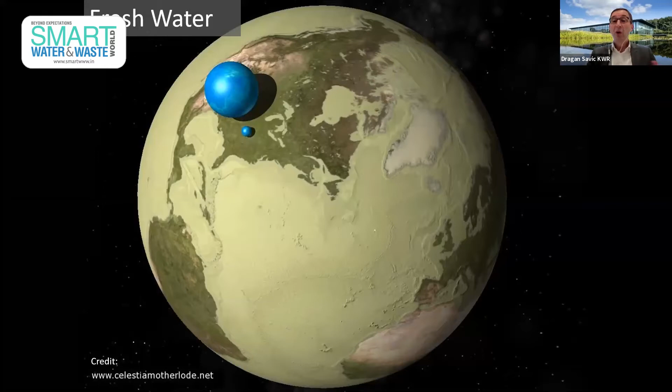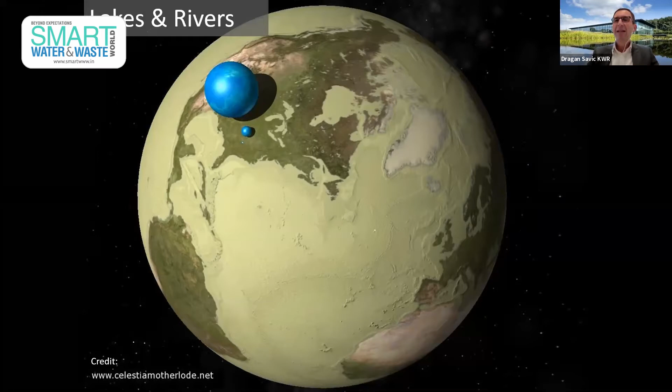And this has been so for ages, no more, no less. And then the smaller amount there, you can see that we have much less fresh water. And if you blinked, you must have missed it, this little blip here, it's the water in the lakes and rivers. So we really have to take good care of it.

If you look at it, 70% of the water is being used in agriculture, and then there is movement for people going into cities. Over half of the world population is now in cities, and there are 40% increases in population expected over the next 30 years. So we are facing big challenges.

So why wastewater? What is so special about wastewater? Well, over 80% of our wastewater flows goes into nature untreated. That's a sad fact and reality. So we want to reduce that amount of water going into the environment untreated, reducing pollution of the ecosystems, and reuse it - treat it and use it for various purposes.

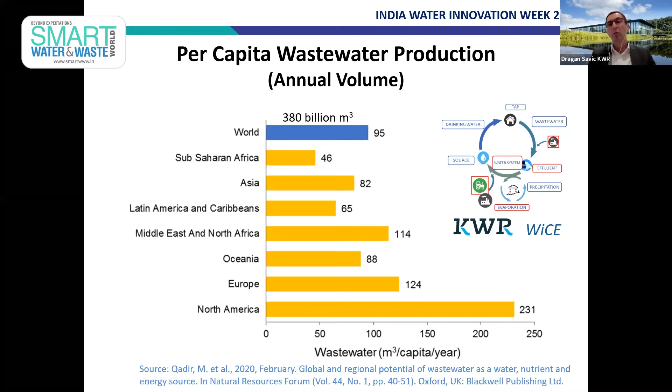And that's why circular systems, looking into water in the circular economy - what we call WiCE here - is very important.

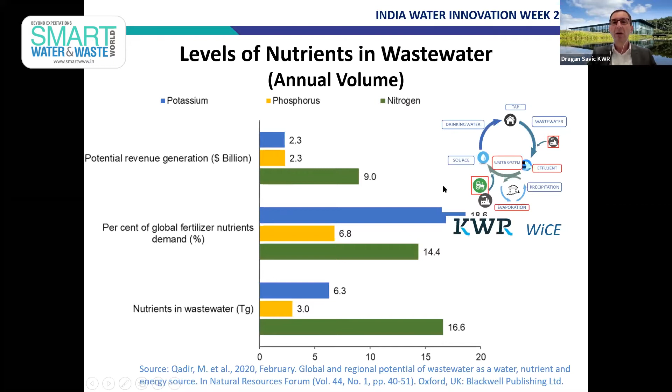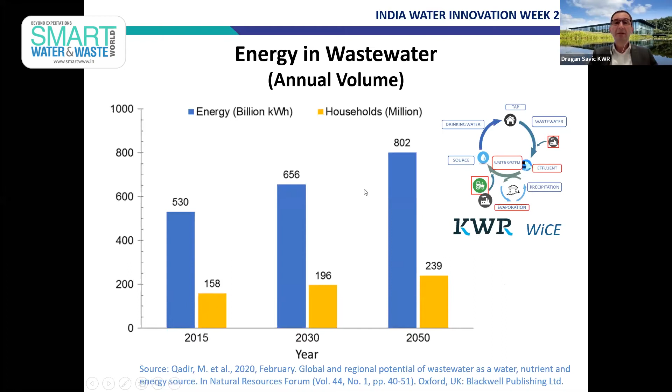And if we move on - I'm having technical difficulties, yes. Wastewater treatment and reuse is not new. As long as the world has been around, or humans, we've been reusing wastewater.

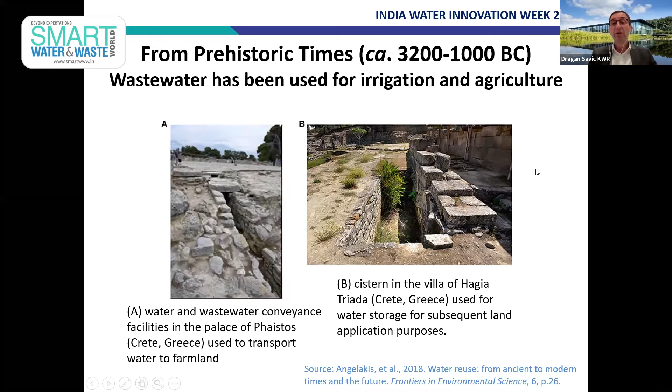These are examples from the Greek island of Crete. In prehistoric times, 3,200 to 1,000 BC, wastewater has been used for irrigation and agriculture.

So what are the different applications? Agriculture, obviously irrigation, landscape irrigation in our cities, and then industrial recycling and reuse. Industrial usage normally, in many cases, doesn't require drinking water quality. Recreation and environmental use - all those non-potable urban uses, not for drinking but for urban areas, groundwater recharge, unplanned potable reuse.

I can tell you that many rivers in Europe and on other continents - what one city releases in terms of treated or untreated wastewater, the other city downstream is using for water supply. And planned reuse - recently, I think 2 years ago, a city in Namibia celebrated 50 years of using some of the highly treated wastewater. The City of Windhoek was using that for augmenting their water supplies.

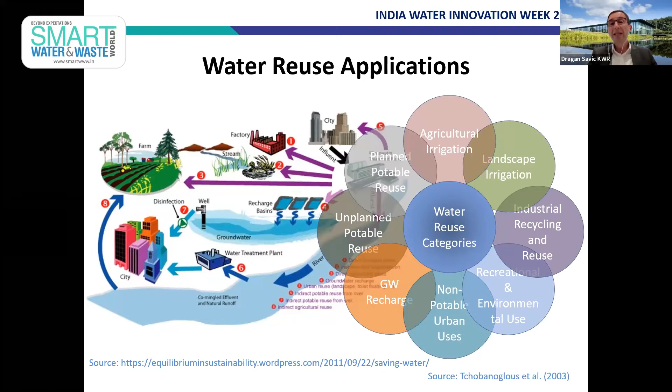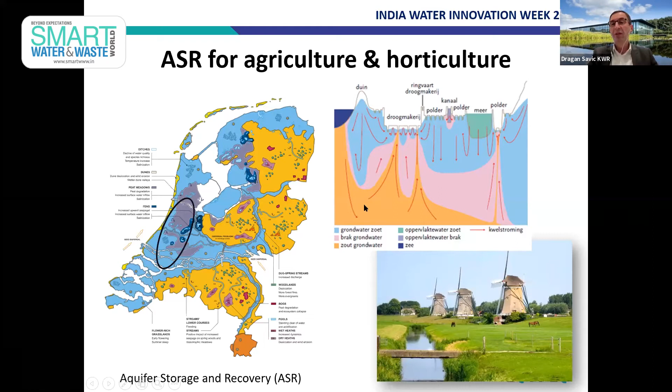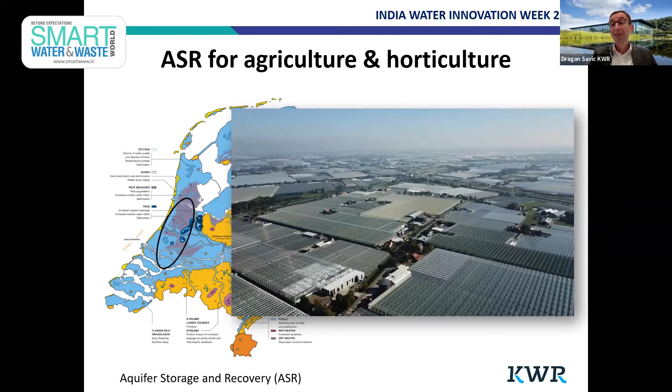So there is interaction there, and it's very important how much of this fresh water we have to protect it from becoming brackish and saline. The Netherlands is one of the biggest exporters of agricultural products in the world, I believe second in the world. What you see here is the greenhouses along the dunes, where they produce a lot of that produce for selling in the Netherlands and abroad. So they need constant and continuous irrigation.

This is an example where in blue you have greenhouses in Nieuw Prinsenland, 260 hectares of modern greenhouse areas. In this same area you have sugar factories producing from sugar beet. Sugar beet processing is done in a campaign, just 3 months a year, and requires lots of water, producing lots of wastewater, but only for those 3 months, whereas the greenhouses require water continuously throughout the year.

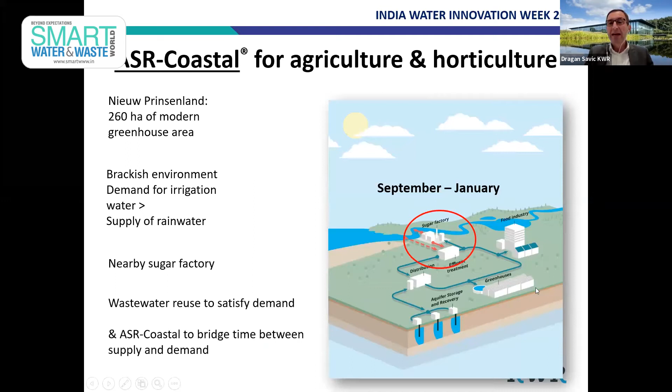So what is the solution? We have a brackish environment there, and demand for continuous irrigation is greater than the supply of rainwater. So what do we do? Here's the situation from September to January, that's the campaign when the sugar factory gets all that water produced. Then we have greenhouses that need it in spring and summer.

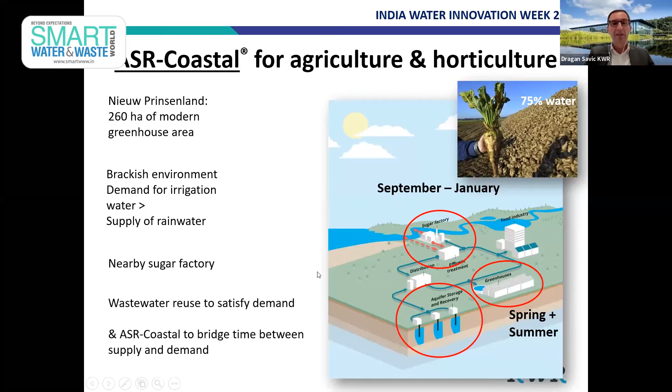So our solution is that all that wastewater is treated to the level required for agricultural irrigation. Then we put it into groundwater for storage, because you have that density difference between brackish salty water and fresh water, so we can keep it there. It's not easy, but we can do it, and then use it to bridge the time between supply and demand.

Another application involves underground drainage systems, pipes, perforated pipes that collect water and drain it away, but we use that system in reverse to do sub-irrigation when it's needed for the plants being grown. You can see Bavaria Brewery, that's food industry, but we're linking it to agriculture. The same thing happens in Haaksbergen, domestic wastewater applied to agriculture. All of it uses this existing drainage system, but in reverse when we need to irrigate.

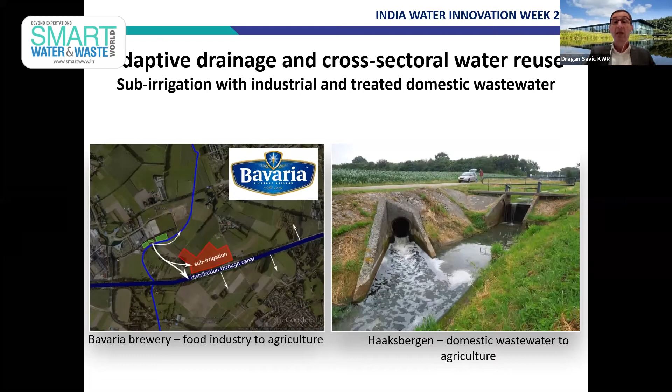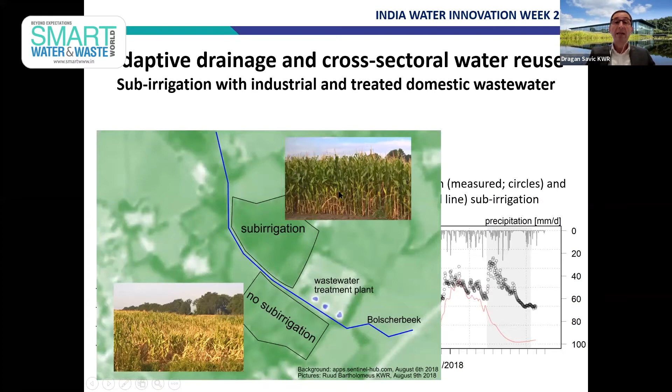On the left you have two areas, one that was sub-irrigated and one that wasn't. You can see the difference in the maize. When it was sub-irrigated, it was really nice. When it wasn't, it's really yellowish and brown. That slide didn't work well, it was showing something else later on, but let me move on.

We also at KWR look into quantitative microbial risk analysis, so we've developed tools to see what the risks are of using wastewater in various applications. We created this transparent, science-based online tool, which is also user-friendly.

This gives an example of how that tool, AquaNES, is used for water reuse applications. We see the quantity of microbial pollutants and how they are reduced: 1 log means 10 times less after the first treatment, 2 logs means 100 times less after ozone treatment, then 3 logs when it gets to slow sand filtration. We use Monte Carlo simulation to look into uncertainties at each time step, so you can test different scenarios. So that's an overview of some applications where KWR has been involved with wastewater reuse.

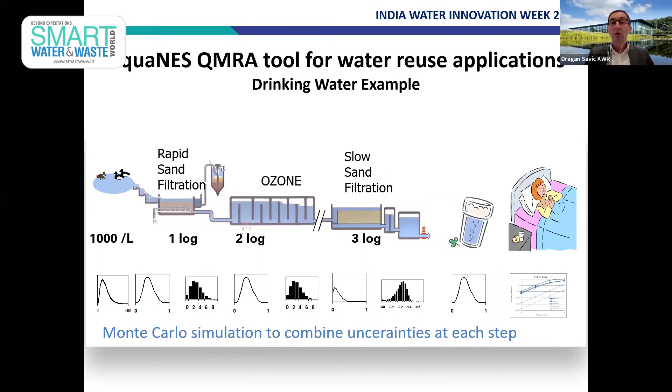As a conclusion, I'd say we need to move to responsible water reuse, where it's safe to use treated wastewater. This requires an incredibly interdisciplinary approach: you have to have health specialists, microbiological specialists, chemical quality specialists, and treatment technicians. So we're talking about sustainable use of water.

We need legislation and regulation, and sometimes regulation is much more stringent for treated and reused wastewater than it is for drinking water. Then we have various treatment technologies that we need to understand, as I mentioned, health and safety, quantitative microbial risk analysis. We use this when we look into reuse for agriculture or industry, and also subsurface water storage. Quite a lot can be done through water storage in the groundwater, both temporally and spatially.

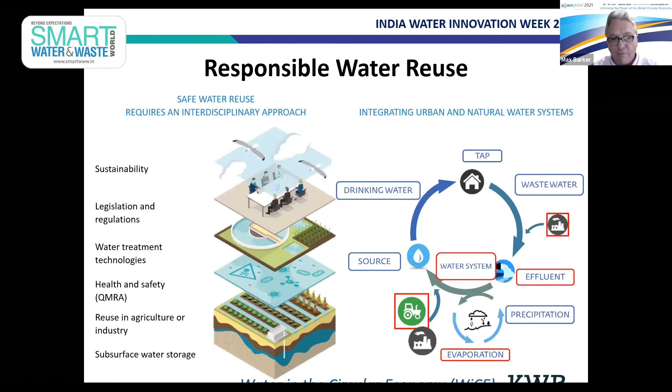Okay, fantastic. We've actually had a large number of questions come in for you from the audience, and we'll by no means have time to answer them all today, but I'll just pull one or two out at random for you. One of which is: out of overall energy available in wastewater, how much is it feasible to extract and is actually usable? Yes, that's an excellent question.

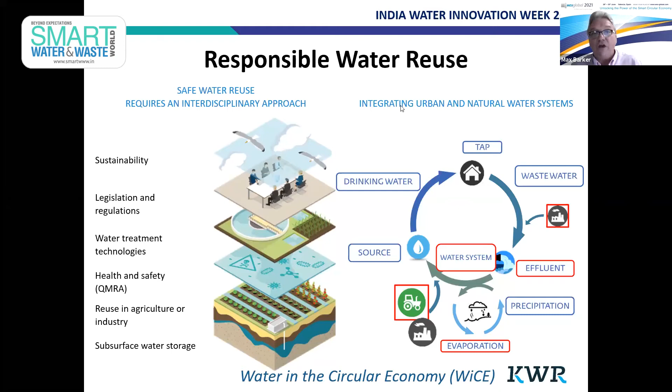We now have 5 case studies covering a wide variety of water reuse projects across the globe. We're going to begin with a look at the wastewater strategies of the Municipal Corporation of Greater Mumbai in a presentation given by Mr. Atul Rao, who in his role as the chief engineer on the Mumbai sewage disposal project is leading a number of really innovative initiatives to promote the use of recycled water by targeting bulk users. So to learn a little more about Atul's work, I'd like to hand over to you right now.

Max, the presenter is Dr. Ajit Salvi from the Municipal Corporation of Greater Mumbai. Okay, my apologies. Ajit, I'd like to hand over to you now. Okay. A nice keynote address by Dragan Savic. So I think with that, it will be easier for us to present our case studies. So thanks to Dragan Savic.

I am from the Municipal Corporation of Greater Mumbai, and this will be the small agenda for today's presentation. I will talk in small detail about the existing sewage system, that is the current scenario, then the present sewage disposal system, and mainly I will be focusing on the future plans, that is the treatment with recycle and reuse planning. That is today's subject as such. And then what are the challenges? Dragan Savic has already discussed some challenges and difficulties. I will also talk about these aspects, and then we'll conclude it.

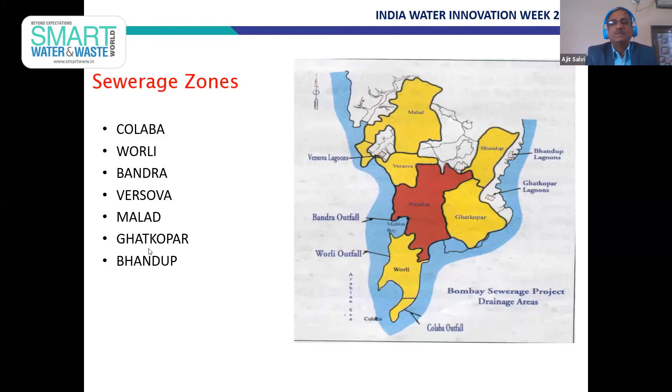Now, Kailash, just see, because it is not moving. Okay. There will always be a slight lag when you press click at your end. It will be a slight lag.

Okay. So this is the sewerage system of Mumbai. I am not going into all detail, but you can see that basically 3,850 MLD of water supply is there, and whatever water supply is there is converted into sewage as a thumb rule. Our sewerage system is almost 130 years old, and at present there is a coverage of 68%.

The sewerage network is around 2,000 kilometers, and the number of manholes covered is 73,213. The idea of this slide is that the existing sewerage system is very vast, and though it is not 100% covering the city, it is still almost covered.

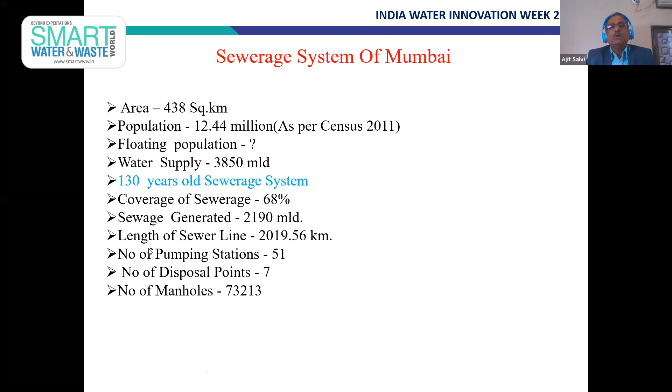Now, if you see existing facilities, as I said in my agenda, I am going to talk about the existing facilities. So these are the 7 sewerage zones, and these 7 sewage treatment facilities are there. Out of that, only one, Colaba, which I have marked in red color, is newly commissioned with tertiary treatment facilities. When I say tertiary treatment facilities, that means there are recycle and reuse facilities, and the capacity is 37 MLD. This was just commissioned in April 2020.

So this particular plant is newly commissioned, a full tertiary treatment facility, and we are planning that this recycled treated water will be used for reuse purposes. All our other facilities at Worli, Bandra, Versova, Malad, Bhandup and Ghatkopar are old facilities, and their treatment level is almost at the level of preliminary treatment.

In Worli and Bandra, the disposal is through marine outfall. In Versova, Bhandup and Ghatkopar, the disposal is through lagoons. But secondary or tertiary treatment as such is not done. So this is our old system or existing facility. Now we are going with the new plans.

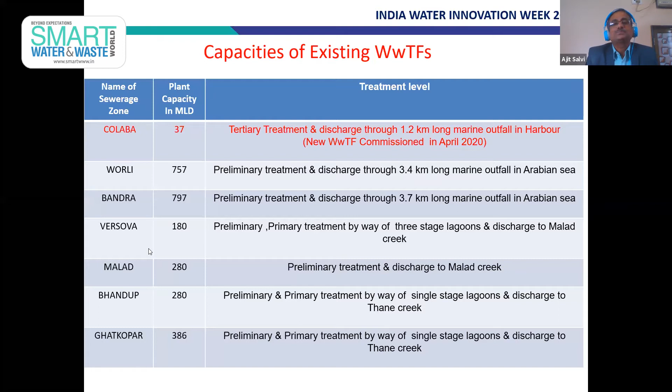So now for the future plans, as per the planning authorities and controlling authorities, there are new discharge standards set in India, and that is applicable to our municipal corporation also. The main aspects are BOD 10, COD 50 and TSS 20. Other things are also there. There is total nitrogen control, and phosphorus limits are also provided.

The point is, the new discharge standards are comparatively strict, and we have to treat up to the 10-20 standard, that is BOD 10 and TSS 20. Up to this standard, treatment is required, and accordingly the planning is already done and it is to be implemented.

Now these new projects are based on open technology. DBO contracts are there with operation and maintenance of 15 years as per the FIDIC conditions. And the main aspect is that there is a 50% capacity for recycle and reuse. That is the main aspect of our future plan. Now, with this,

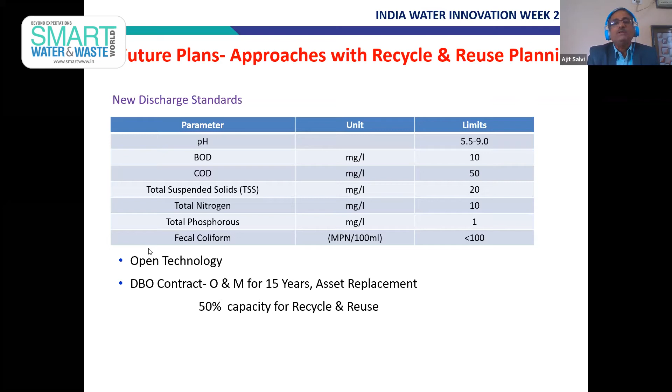so far as the tertiary standards are concerned, which we are going to use for reuse purposes, it is still a stringent standard: BOD as it is 10, but TSS we have to go up to 5, and fecal coliform should be below detectable limit. All other standards you can see on the display. My idea is, with all these stringent standards, we are doing the planning for the future, and we have to implement our planning based on these particular standards.

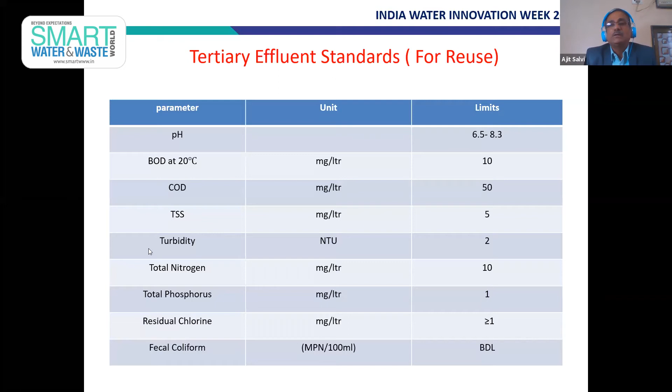No doubt, after that, there is a provision of the remaining 50% of the plant capacity to be reused in future based on the demand available for the tertiary treated water or treated wastewater. So based on that, for the remaining 50% also we will be going for the tertiary treatment.

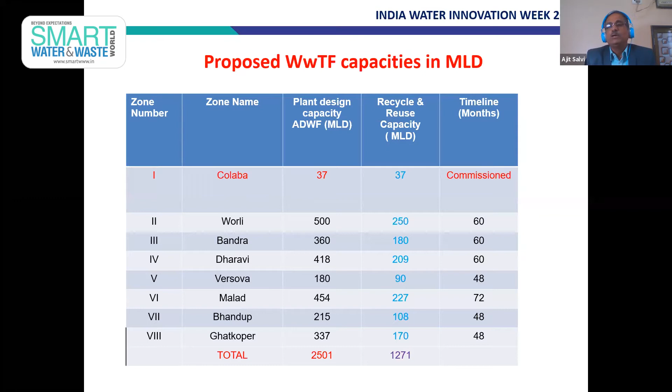Now, for new projects, particularly in Mumbai, there are some challenges in the implementation. We will talk separately about the recycle and reuse, but as such, with the secondary treatment and BOD 20, BOD 10 and TSS 20, with this standard also there are some problems. The main problem for us is inadequate land. As you must be aware, in Mumbai everything is available except land. So that is a problem.

This city is located on a coastline. So there are some mangroves, and there are some problems for removal of the mangroves, and definitely we have to obtain the proper approval for that. Then clearances from the environmental ministries and coastal regulatory authorities. At some of the places there are encroachments also. So before we go for the execution, we need to remove these encroachments also.

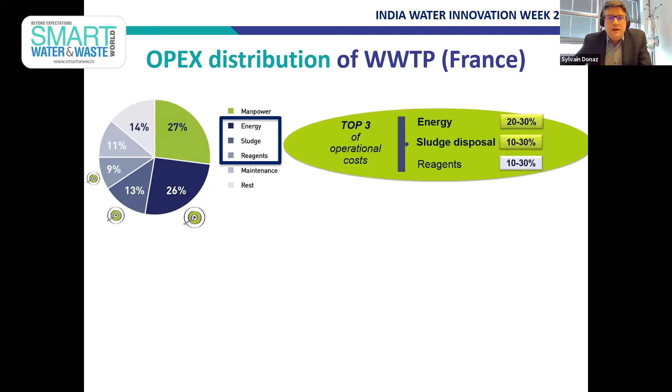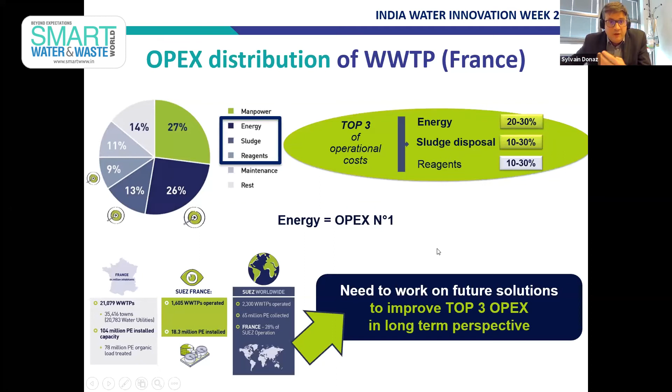As Suez, we are an operator and a technology developer, and we wanted to make sure we select the best, most energy efficient solution for secondary treatment. Therefore, we wanted to work on future solutions based on those top 3 OPEX: energy, sludge, and reagents.

So based on those analyses that we did from our operational base in France, we have noticed that the most and best energy efficient water treatment technologies are conventional activated sludge, that we call here CAS, and of course SBR, sequential batch reactor, and also biofiltration.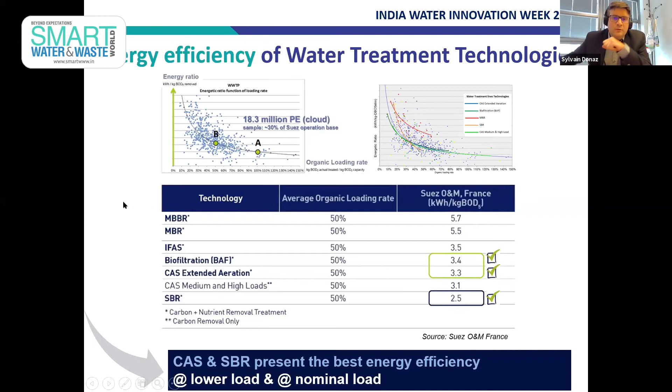So based on those status and analysis, we wanted to see how we could improve those CAS systems, conventional activated sludge, and SBR systems. So we have worked in the past 3 to 5 years on a new concept that is biomass densification, that implements a very precise controlled microbiome shift of the existing process, whether it is a brownfield existing plant or a new one that you want to build in greenfield.

So we have worked on a microbiome shift that transfers the former activated sludge of flocculated biomass to a new densified biomass, which is more heavy, which is denser, and which has a more cost-effective, operationally effective performance. This biomass densification is made of aggregates that have a size of greater than 200 micrometers that we increase in the biological system through a specific controlled microbiome shift that we implement.

Sorry, I need to get back. We have decided to implement this new microbiome shift in two types of treatment technologies, the first one being the continuous flow reactor of conventional activated sludge. So it's all about having a baseline with conventional activated sludge that you're going to shift to a better, efficient biomass with much faster settling abilities, thanks to a new control system. So these are for continuous flow reactors.

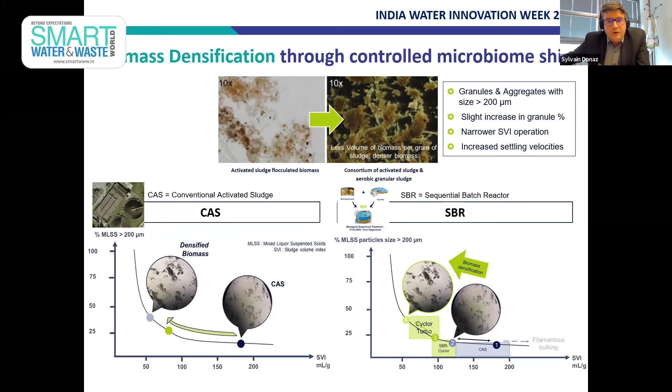For sequential batch reactors, we wanted to implement exactly the same shift of microbiome to increase the performance of the plant, and this had to be done on an SBR sequential batch reactor system. So I'm going to present you the two solutions, the two full-scale developments that we have finalized and validated in France on two separate plants, one in central France and one in south of France, where we had a continuous flow reactor applied with biomass densification and a sequential batch reactor.

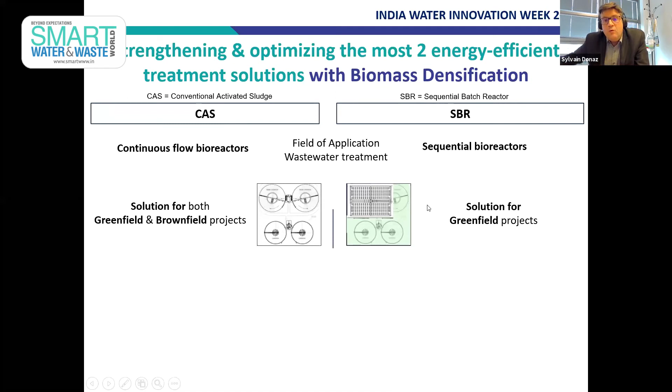As you can see, conventional activated sludge is most of the time applied for brownfield projects, existing plants, but we can also apply it for new greenfield projects. And when footprint is concerned for greenfield projects, of course, SBRs are a good choice because they provide a lower footprint that can ease the integration on site.

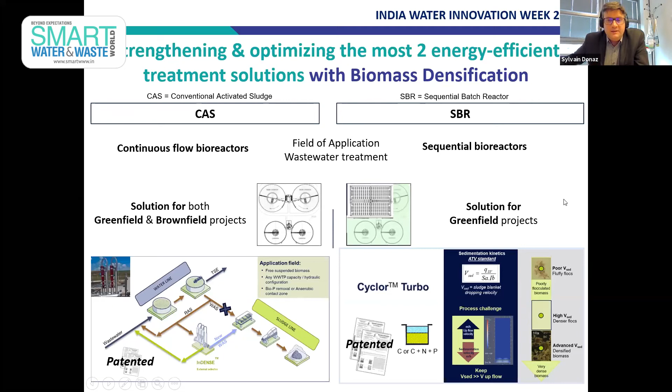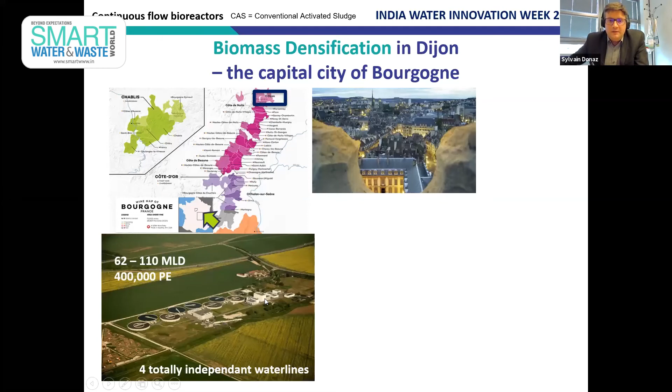So this is a wastewater treatment plant in the middle of the countryside, south of Dijon city. The capacity in dry weather is 62 MLD, megaliters per day, up to 110 megaliters per day in wet weather conditions, and the plant is treating about 400,000 population equivalent. So what you can see here is that this plant is made of 4 different lines, totally independent, that allowed us to implement and test in real conditions the famous microbiome shift using biomass densification.

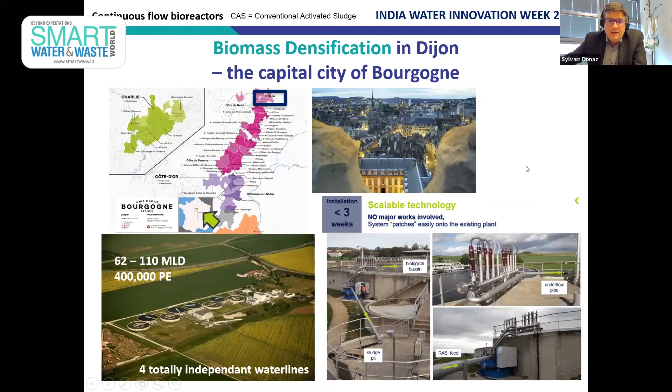So we have integrated the new technology, which is in fact a new process approach of how to handle biomass in a bioreactor system. This has been done very quickly, in less than 3 weeks' time, with a new equipment system and a new process control approach. So this was the site implementation that you can see here on the bottom right of the presentation, and I will share with you the nice performances that we achieved over a 1 year period, which means here in continental Europe, dealing with dry weather and extreme wet weather and cold conditions.

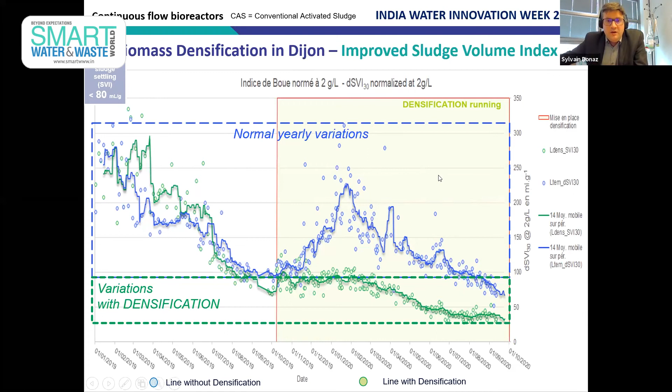We have achieved less than 50 milliliter per gram of sludge volume index, reaching today, as we speak, 35 in a continuous flow reactor system. This technology and full-scale test allowed us to find new guidance in terms of design and operational rules for new biomass densification systems. And now we are ready to implement it on any of the plants, brownfield and greenfield.

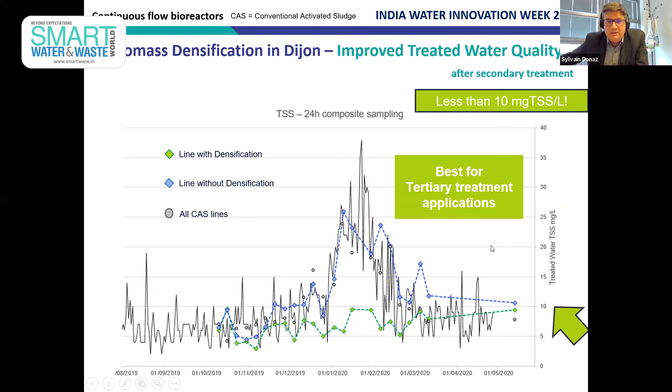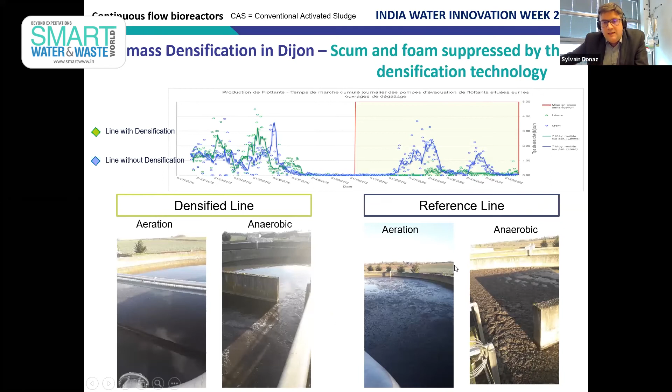I show you here the TSS, total suspended solids, that we achieved in this condition, where you can see in green that the quality of the secondary treated water is much better than the existing line, with lower than 10 in total suspended solids. So it's best for tertiary treatment. Also, in the picture here, the densified line has no foam production anymore, while the existing line is still dealing with a lot of foam in operation.

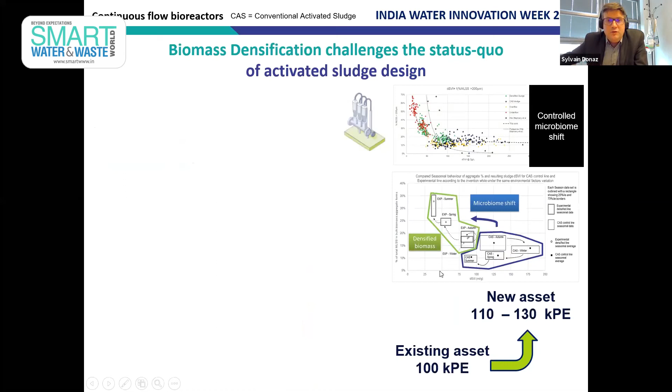I'm going to go fast to show you that biomass densification in a continuous flow reactor is a real microbiome shift from the existing baseline in blue to a new, greener biomass that is more robust and allows better performance. This is a new publication that we are releasing very soon.

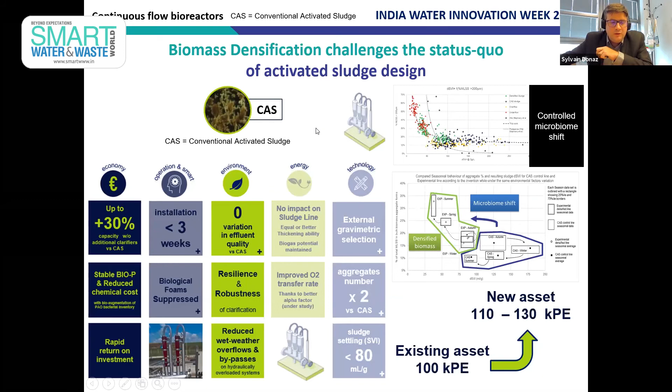So there are lots of implications, improvements, and impact for wastewater treatment plants across the world, and we are ready today to apply this concept in any of the plants to improve the quality of the water before any new tertiary system, whether it is for wastewater treated water reuse or micropollutant treatment.

Last but not least, in the French Riviera in Nice, in the south of France, you can see the city of Nice. Suez is operating and has built the wastewater treatment plant. This plant, you can see at the bottom, is in a very narrow footprint condition.

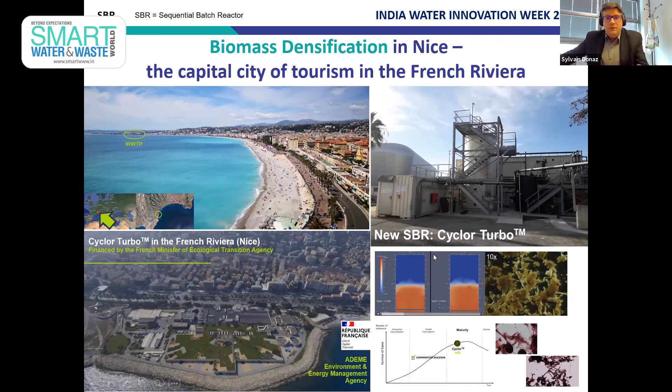So we studied the new SBR Cyclor version using densified biomass with the French government. We tested and validated it using a new type of system with new key hydraulic upgrades from our existing conventional Cyclor system, building a new generation of it. We did strong hydraulic engineering based on our existing Cyclor, improving the biomass condition through a new hydraulic design.

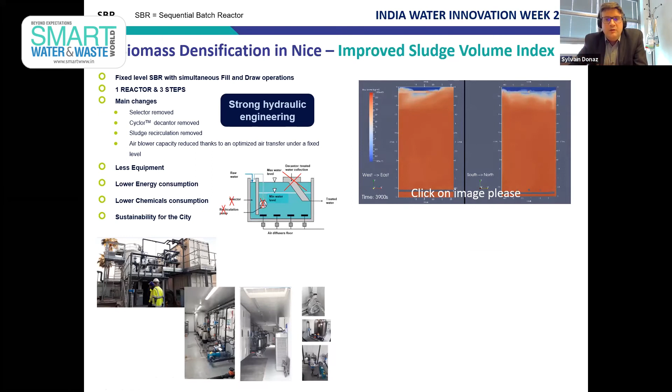So I show you that we worked on very tough hydraulic conditions that we mastered in deep detail to manage the best interaction between raw wastewater and the new densified biomass, to ensure the best conditions are met. We applied this system over a minimum 6-month period; it's been running now for more than a year, and we have validated the performance of the new system, with a very low SVI, stable and robust, thanks to the biomass densification system.

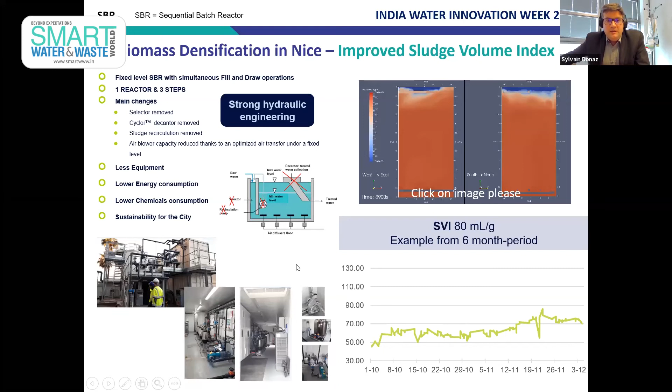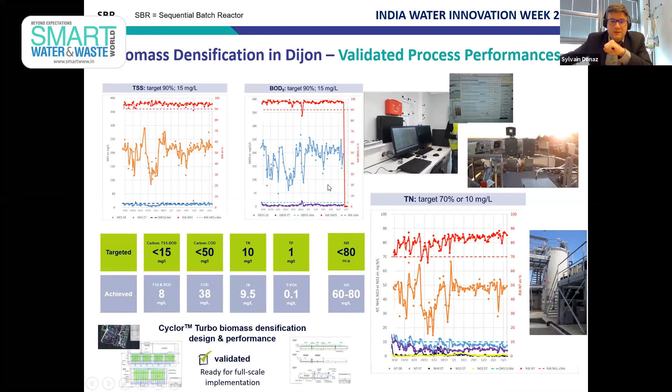So I would like to thank you, and let you know that we are very excited to share our latest development with this new concept, a controlled microbiome shift that we can implement in any bioreactor. This is our most recent result, which we are going to share more and more. Our most recent go-to-market solutions, as you have seen, are based on continuous flow reactors and sequential batch reactors that we can apply in brownfield expansion projects, retrofitting, or greenfield, whether you have footprint constraints or not. I thank you for your attention.

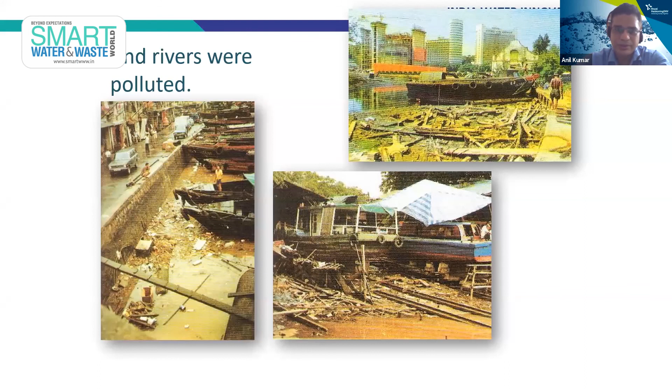The rivers were extremely polluted, and an initiative done by former Prime Minister Lee Kuan Yew - they made a policy where water is dominant in every other policy, and every other policy has to bend its knees for our water survival. This was the key message which went from the top leadership level to all departments in Singapore. With these efforts, every policy in Singapore has water has a place, and the recycle-reuse program started in the early 1970s, because of their relationship with Malaysia.

They had a couple of agreements with Malaysia which are going to end very soon. So the concept of new water, meaning treated wastewater, was launched in 2001, which means collecting every drop of water and reusing it as much as possible.

Currently 30% of the demand, approximately 400 mgd, is met by new water, which means treated wastewater. They are aiming to meet 60% of demand by 2030 and produce new water to drinking water quality levels. Currently, they use this treated water for industrial applications and also indirect drinking reuse.

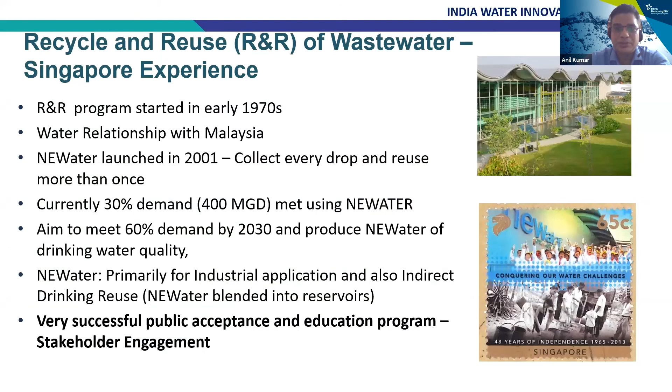They blend the treated wastewater into their reservoirs, and then supply it after treatment to the public. It's a very successful model that has been in discussion for many years, with huge public acceptance. The government has spent a lot of money on public acceptance education programs, including stakeholder engagements, and even created stamps promoting recycling and reuse of wastewater.

So how have they achieved this? Most of the water comes from Malaysia through two agreements as the main source, and they see that as a risk for the country over the next 20 years or so. They recognized that risk in the early 2000s and took an initiative.

They created one department which can manage the entire water cycle, and they diversified the water resources into four national taps. I will talk about the four national taps in the next slides. So all the water supply sources come under one department.

They had unified agencies, made a national theme, and prepared a strategy so that this sustainability concept in water management could be adopted into Singapore's water management. The four national taps they identified are stormwater management, imported water, seawater desalination, and treatment of used water.

From these sources, they developed their infrastructure, like treatment of used water—what we normally call wastewater, they call 'used water.' They reclaim this treated water and mix it with their water supply source.

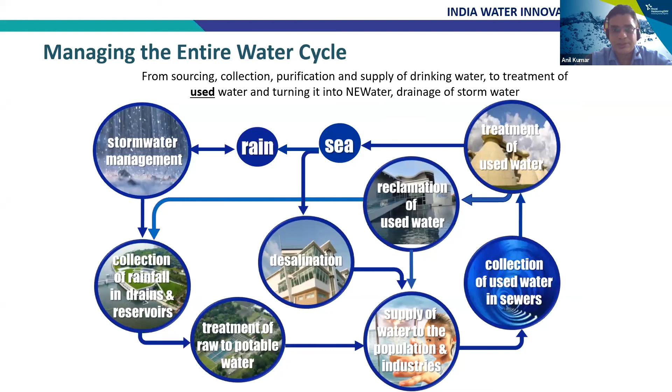They also manage stormwater, collecting rainfall into their drains and reservoirs, and now use that water for potable purposes. That's how they manage it—most of their water, including wastewater, is treated and collected very well.

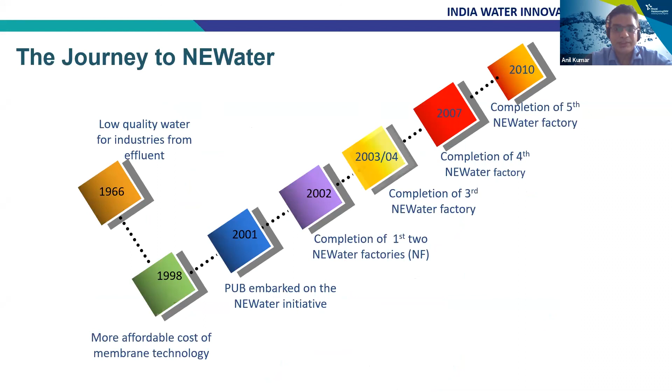The journey started from 1998 onwards, and by 2010 they had completed almost 5 plants producing new water. PUB has taken on the role as an entity to manage this entire initiative for the Singapore government.

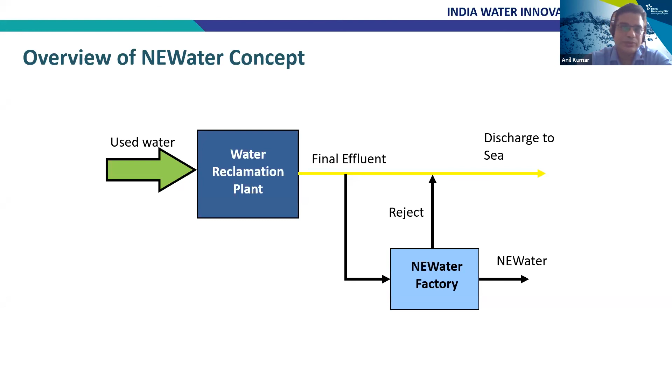So for the concept of new water: they had a traditional wastewater treatment plant, called a water reclamation plant, and that water is used in the new water factory. In the new water factory, they produce what's called new water, which is now used for various purposes in Singapore.

The production process adopted in the new water factory: the treated used water is passed through microfiltration, ultrafiltration, then reverse osmosis, and then disinfected using ultraviolet disinfection. In fact, they use this water even for drinking purposes.

If you visit these plants, you are served with these bottles actually. I myself drank this water a couple of times whenever I visited Singapore.

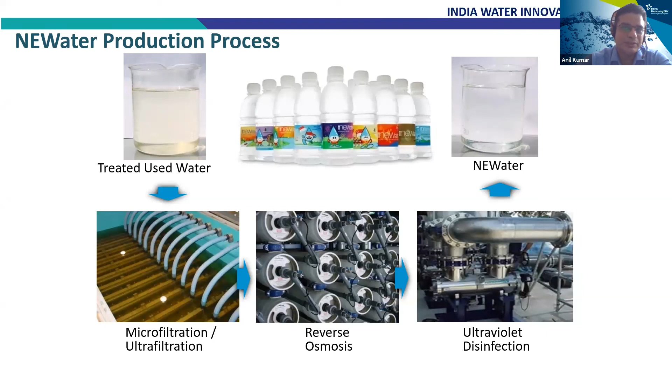One of the great initiatives they have taken is working on their organizational setup. They made a steering committee chaired by the Prime Minister himself. There were various panels formed, from consultants to technical committees to expert panels, starting with sampling and monitoring programs, followed by a demonstration plant, and they also had a health effect study team in place. All these core organizations are responsible for managing the complete new water system.

This structure is still in place in Singapore today. Currently, through their sampling and monitoring program, they monitor 295 water quality parameters, over and above the 100 parameters specified by US EPA and 114 specified by WHO. This is the most comprehensive water quality study the Singapore government conducts as of today.

There are wide varieties of parameter categories they monitor, following best laboratory practices. They have a very good QA/QC team and have set analytical protocols adopted by many other countries. The quality of data they manage is really good, and it helps a lot in troubleshooting issues they come across in the loadings entering their wastewater.

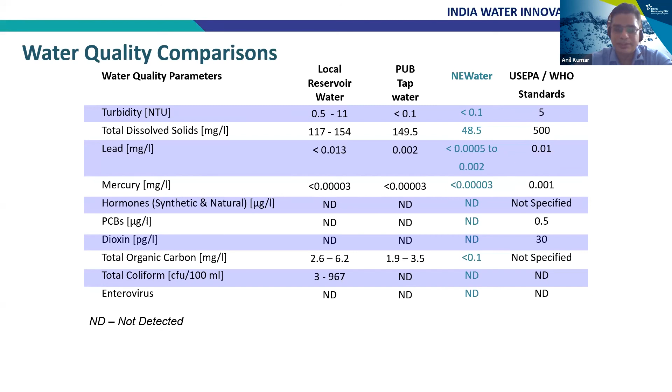And if we compare these local reservoirs, like raw water reservoirs or tap water supplied directly from reservoirs, or US EPA standards with NEWater, the kind of treatment they are doing is well above the key requirements of various parameters like turbidity, total dissolved solids, or any other heavy metals or dioxins or total organic carbons. So the currently treated water is actually well above these standards.

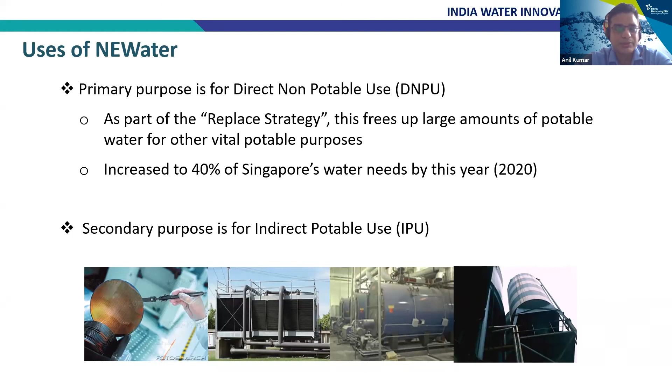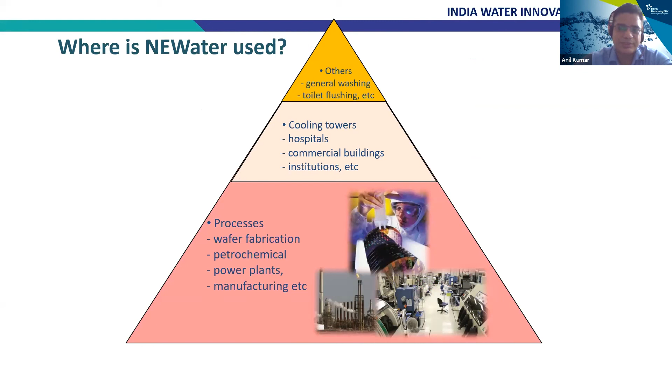Currently it is mixed with the reservoirs, as I said earlier, and the entire commercial and industrial activities are dependent on NEWater, and as they are moving forward they are entering into domestic water supply also. The other use of this water is general washing and toilet flushing in the new buildings and infrastructure they are creating. They are using it in hospitals, cooling towers, commercial buildings, institutions. They are also using it for various petrochemical industries, power plants, and manufacturing industries. That's what NEWater is.

But the most important part is how do we choose words. Like Dr. Ajit Salvi was mentioning, can we use the terminology called used water versus wastewater? It's just a mindset, public perception on the use of terminology. Then reclaimed water versus NEWater, or water reclamation versus sewage treatment. So these terminologies changed the mindset of the public, and they now have more emphasis on some of the new concepts, some of the new RO technologies.

And besides this, the media, opinion leaders, and public played an important role. These were all stakeholders who were engaged, and the Singapore government has spent a lot of time and money engaging their stakeholders. For example, when the NEWater demonstration plant came up, media and various countries were familiarized with this concept, the features were evaluated, and various documentary films were created in various languages so that people are educated. Then various university and institute experts' opinions were taken so that the project is endorsed by water experts.